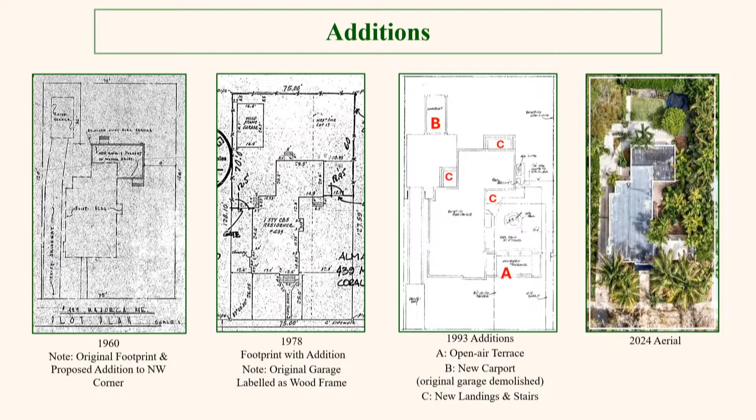The front facade of the original home is dominated by two Mission Revival style characteristics: the curved parapets and the arched openings. The front facade has two bays, the western living space bay and the slightly protruding front entry porch. Each has a central large opening with a distinctive Mission Revival curved parapet above. A convex pointed parapet adorns the living space, and the typical rounded parapet is above the front and the side entry porch arched openings. The parapet wraps around the porch with battlement corners.

Windows and doors on Mission Revival style homes are often arched. This house accentuates the openings with rough-faced cut stone. At the living space window, the stone is arranged in a jack arch fashion. The stone was removed or covered at an unknown date, and a change in stucco clearly marks its location.

Rising near the southwest corner of the home on the west facade is a projecting and shouldered Moorish-inspired chimney. It demonstrates the broader influence of Islamic architecture on the Spanish and its incorporation in the Spanish missions. This influence is also seen in the Mission Revival style. The chimney is a hallmark feature of the home. Flanking it were small windows which were blocked up around 2013. The west facade also has a Mission Revival parapet at its center.

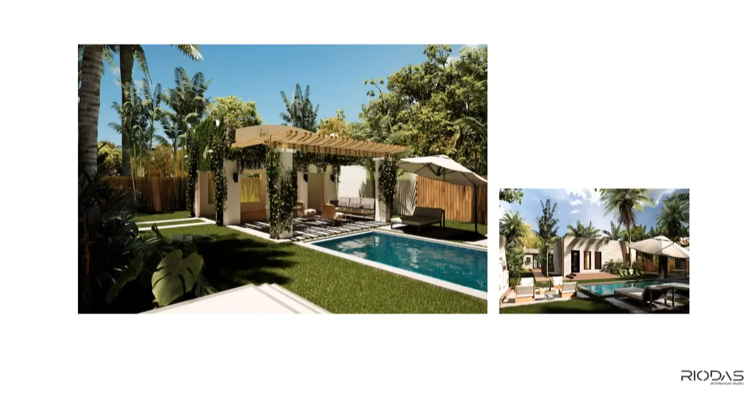This is kind of the style of the rear facade, and we're adding a pool as requested by the owner, by the new owner. Thank you.

Is there anyone else that wishes to speak to this? Okay. Any board members? Questions of the architect?

I have a brief question. Have you looked at the staff report and at all the conditions that staff is asking you to comply with? Are you okay with those, the conditions in the staff report? Yeah, I mean, we didn't get the report. Is that what was sent to us? I'm sorry, I couldn't read it completely, but I can take a look.

Windows and door and what? Okay, thank you. Take your time. Okay. You're okay with all of those? Yeah, okay, 100%. And also with the retain-

I'm sorry, Ms. Rolando. And also to retain the coral rock in the front. Yeah, yeah, thank you. On the east. Yeah, yeah, correct.

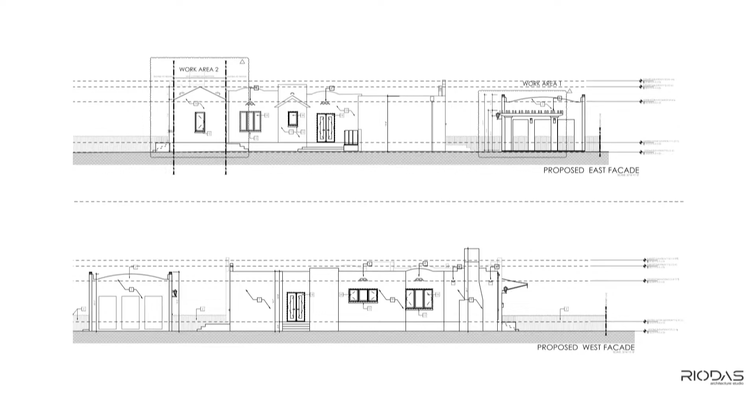Mr. Silva: I appreciate the design work. I don't have an issue enclosing. I mean, we are drastically changing the front facade, but we are altering a 1993 addition, so I don't have an issue enclosing that. I think it's a smart move, and it keeps it as a one-story solution, which I think is smart.

Whoever is making the motion, if you would entertain - right now I think you're counting on the vehicular gates as part of your pool gates, and that is not allowed by code. So you're going to have to add some fencing somewhere. I would ask that you work with staff to establish that fencing, because I think it's going to have to go through that carport and the gazebo area, and that has to be handled well. So I would ask that that gets added to the conditions as we make a motion.

Okay, that's acceptable? Yes. Okay, yes, thank you for that - the pool barrier. Ms. Rolando, any questions? Ms. Everett? Ms. Spain, anything further?

So there is a reveal, there's a setback of a couple of inches on the... Can you go back to the front facade? Well, maybe not, okay. So there is a way to differentiate the addition from the original, right?

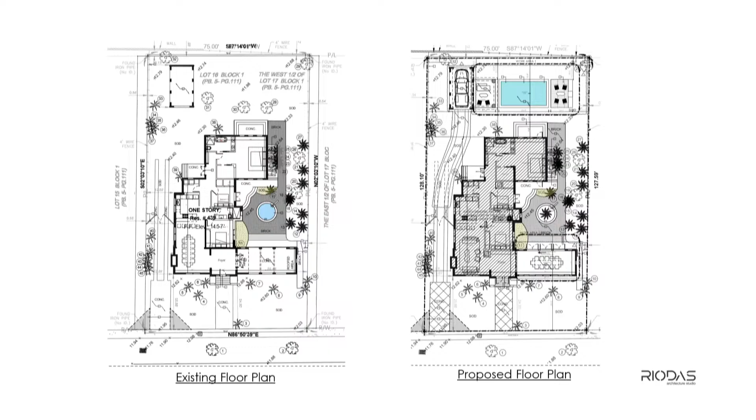Okay, board, what's your pleasure? I'll make a motion if that's appropriate. Okay, we have a motion by Ms. Spain. I'd like to make a motion to approve the design proposal for the addition and alterations to the residence on the property located at 439 Majorca Avenue.

And approve it with the conditions noted in the staff report, with the addition of retaining the coral rock around the, I think it was a doorway, and then also to work with staff in the future on the pool enclosure, the gates and the fence and everything, and with the issuance of a special certificate of appropriateness.

Okay, we have a motion and a second by Ms. Everett. Ms. Spain clarified that this is an additional requirement for the east side door opening - the coral rock. Thank you, we have a motion and a second.

Would you please call the question? Ms. Alvarez, yes. Mr. Silva, yes. Ms. Rolando, yes. Ms. Spain, yes. Ms. Everett, yes. And Mr. Maxwell, yes. Motion carries unanimously.

Thank you very much. Look forward to seeing this in person.

Thank you. We're going to move on to the next case file, which is another combination: case file LDH 2025-014 and case file COA SP 2025-015. Consideration of a local historic designation of the property at 446 Aragon Avenue, legally described as Lot 1, Block 8, Section Coral Gables, Section B, according to the plat thereof as recorded in Plat Book 5, page 111, Miami-Dade County. The applicant is also requesting the issuance of an accelerated special certificate of appropriateness and design approval for additions, alterations to the residence and site work. Variances have been requested from Article 2, Section 2-101D4 and Article 2, Section 2-101D5 for the rear setback of mechanical equipment. May we have a presentation, please?

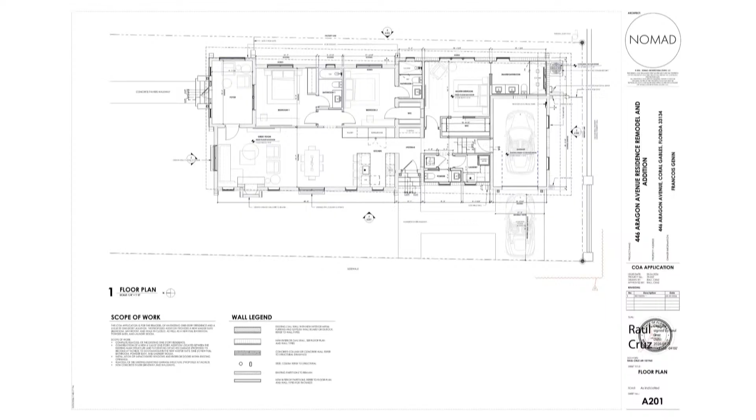The addition is located between the 2 existing structures. Its flat roof and intermediate height create a transition between the residence and the garage, allowing the original massing and historic character of the home to remain dominant.

We are preserving the home's defining exterior features, including the original texture stucco, decorative details, and planters. We will continue coordinating with historic resources staff on the final windows, doors, porch treatment, stucco, roofing, and other details to ensure compatibility with the historic photographs.

We also request approval of the rear setback variance for the mechanical equipment in the proposed location behind a wing wall and a gate next to the existing garage. It is the least visible option due to the corner lot configuration. We respectfully request approval of the COA and the associated variance, subject to the conditions recommended by staff. Thank you, and I will be happy to answer any questions.

All right, thank you. Board, Ms. Alvarez? I agree with the staff report and the addition. I just had a question. Some of these garages were often built out of wood frame. Have you looked at that? We have, the roof is a wood frame, but not the walls.

Are not the walls? No. Oh, that's good. Yeah, that usually creates some additional challenges.

Yeah, for sure. Ms. Spain, do you have any comments? No, I think that this will change the livability of this house. It's very efficient plans. It's very nice.

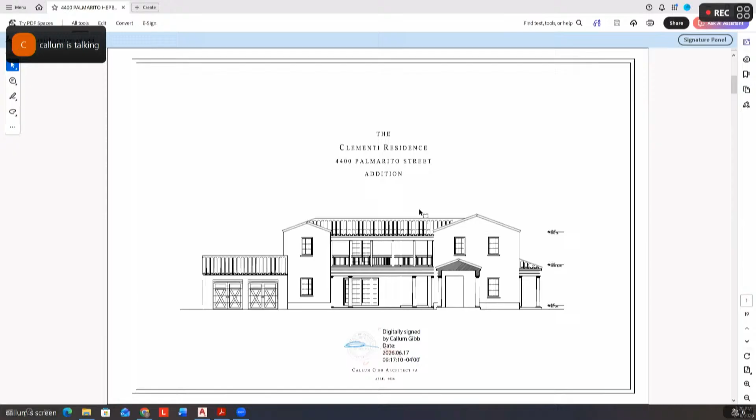Obviously, the house is part of the wonderful Italian Village district, which for me has always been that part of the Gables where the setbacks in the front were usually smaller than in other areas, creating these lovely walled street appearances. The other benefit of this is that you get a lot of courtyard feeling within the district.

The house is on a fairly wide lot, and there's been a pool added, which takes up the whole side yard, as you can see from the survey.

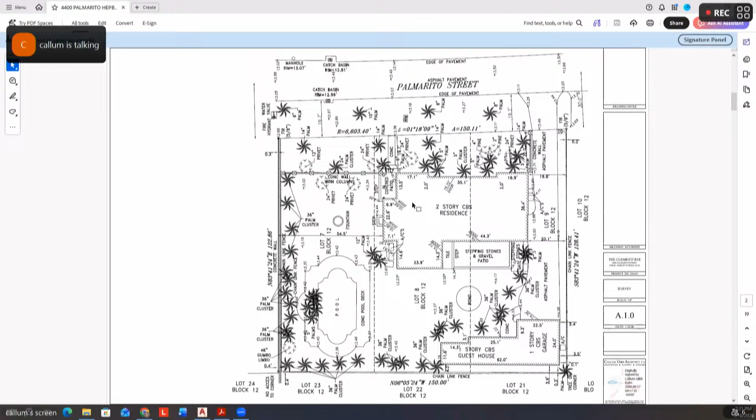Existing site plan, just a little diagrammatic. In the rear, the one-story cottage, which is attached to the existing garage, is the area where our addition will sit. Here are some photographs of the property.

Along the front, you can see that house creates very much a continuous facade with an extended wall to one side, culminating in an arch, a sort of bougainvillea arch which leads to the garage in the rear.

So this is our proposed site plan. The idea being to take down the one-story guest house in the rear and replace it with a two-story addition. Because it then becomes an addition, we have to attach it to the main house in some manner.

So we thought the best way to do that would be through a breezeway with a minimal impact on the main structure.

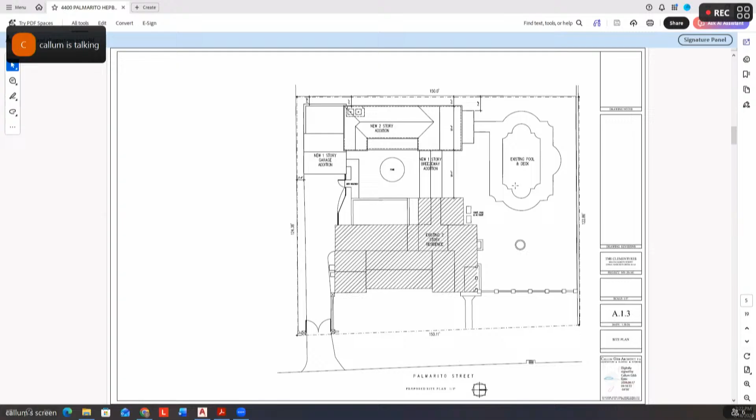Some diagrams: these are the two comparing floor plans, and you can see that the breezeway connection leads conveniently from the kitchen breakfast area across to the new ground floor, and then into the garage undercover.

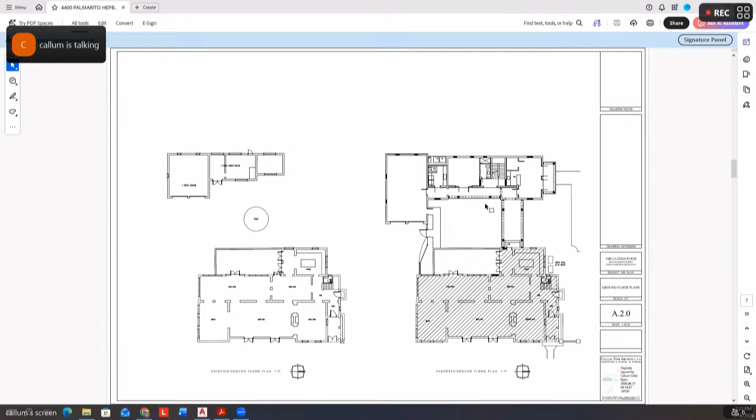This is the main ground floor, and the idea is to expand the living area with a home gym, a game room which could be used for guest bedrooms, and then upstairs two additional bedrooms and a home study.

Again, this is a side, so this is looking from the pool towards the house. You can see the breezeway connection and the massing of the two-story addition.

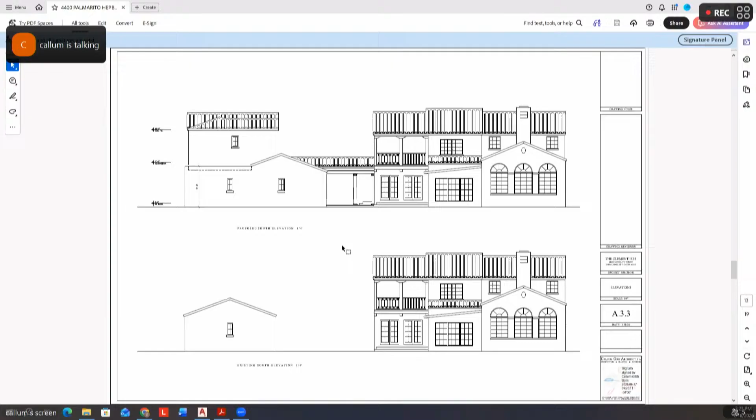This is from the south side looking across. You see the three arched windows in this original house. As you move back into the property, you can see the garage, the two-story addition, and the existing porch that overlooks the courtyard.

There's a rear elevation of the house showing the connection. And this is the new rear of the property. On the bottom is the existing one-story garage and guest house, and then above is the new two-story addition.

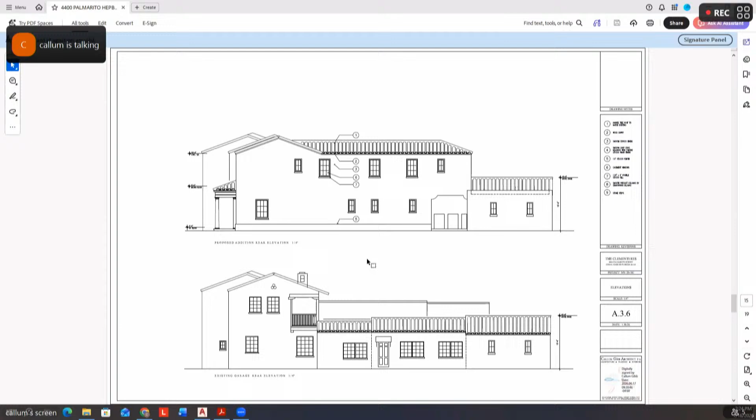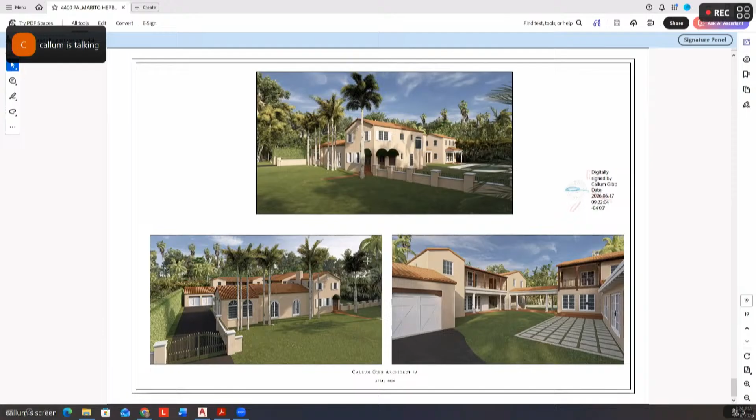I'm going to show you some renderings here, just to show the impact from the street. By locating the addition in the rear, we felt like we'd isolated that home as a complete structure and kept it as original as possible, with a minimal impact on that structure.

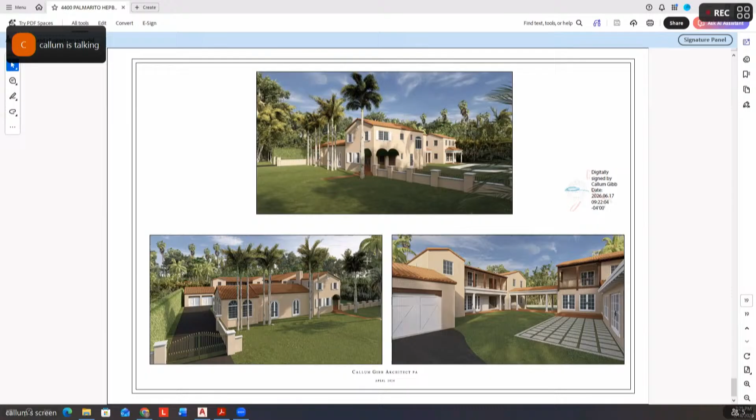And then in the bottom right, you can see this creation of a courtyard, which is developed between the existing house and the new structure.

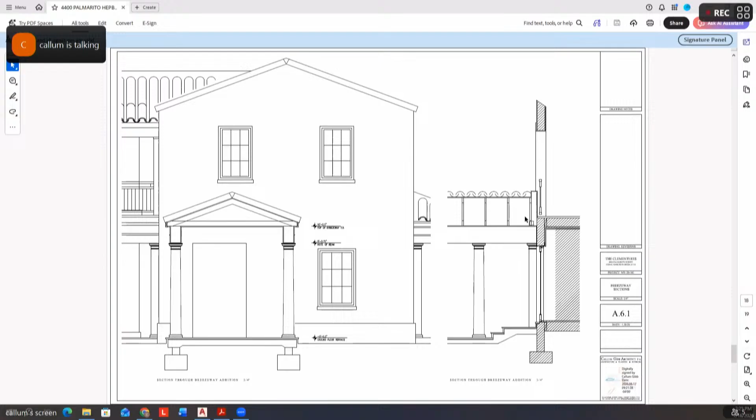I have some pictures also of that porch I wanted to show you.

Try again. Okay, so we got two little porch details here. I think what they show is that the main wooden structure is actually the beam that runs across the top of the porch, and that the vertical elements are really just cladding to the masonry. You can see I don't think there's an embedded wooden column in that corner - I really feel it's more of an implied wooden column. So when we attach to it, I don't think we're going to affect anything structural in that area, and we can adapt that as staff deems most appropriate.

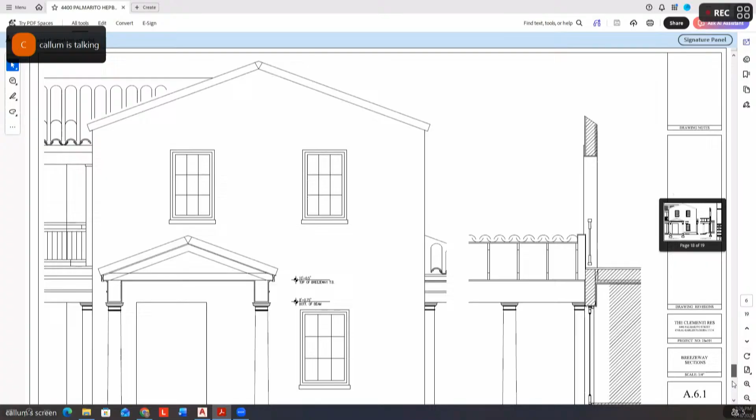So with that in mind, I'll go back to the renderings. Like I say, the goal of this was to expand the property, the living quarters, but maintain the original house as intact as possible. If you have any questions, I've seen the comments - they all seem very reasonable. Hopefully we'll come to an agreement on how best the detail between the addition and the main house is resolved.

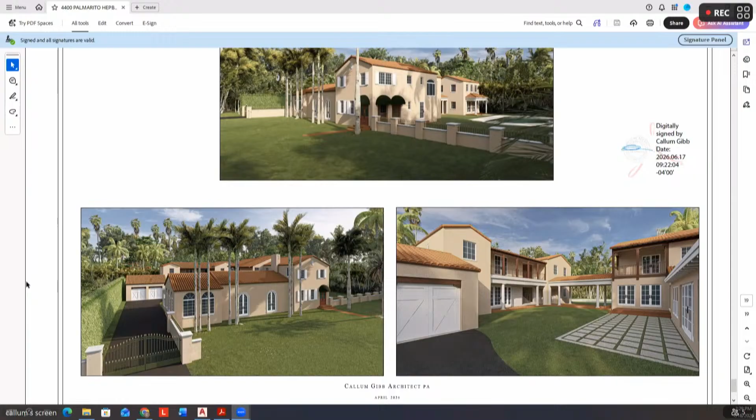There will be a cleaner break between the two. Okay, so there's a clean wall in front, and it's a gable - or is it? Yes, it would be triangular in profile. Let me just get - so it sort of cuts into the... if you were on the porch looking out, you would look through the railings and see the backside of that concrete gable. Okay, and you're confident you can save those rails? Yes, the rails are not original.

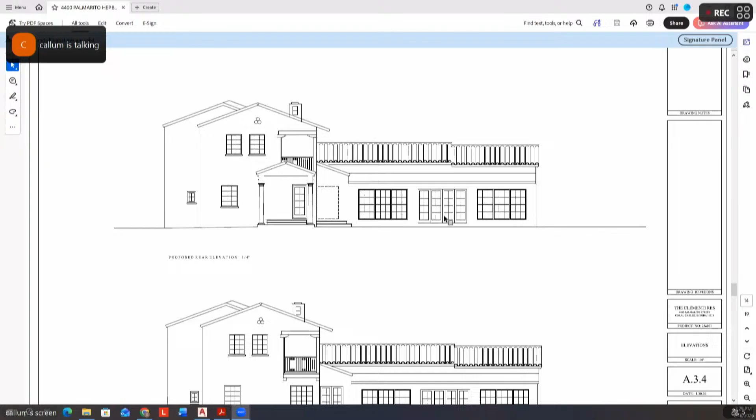Okay, Board. Ms. Alvarez, any questions? No, I just want to say I support the proposal, and I agree with the staff recommendations and the variances. Ms. Bain, I'm good with it.

Mr. Silva: Yeah, speaking about the variance, I think the addition and the way it's being handled and set to the rear is great. I think the massing works well, and you're creating another one of these courtyards you talk about in the district. I'm a little bit concerned that one of the justifications we're using to justify the variance is to save historic fabric, and then we're tearing down a big chunk of that existing building. I think that by keeping the garage, that mitigates it a little bit, and at that point it makes sense to hold that line. So I am in favor, but it's not cut and dry to me. I am in favor though - I believe the variance is justified. Thank you.

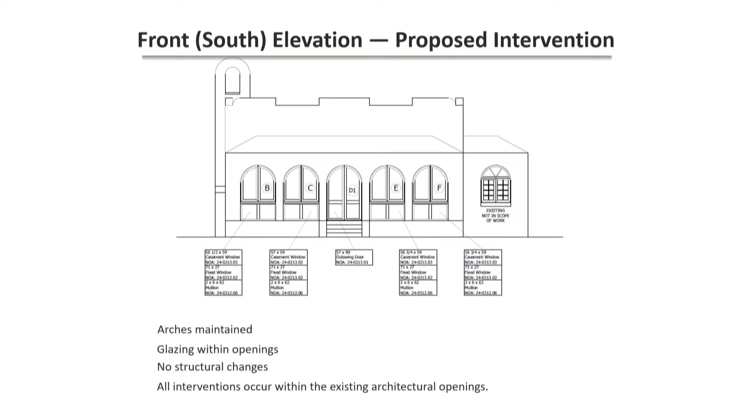Are we going to have another new presentation, or just a discussion? It might be good to hear from them directly, just for the record, and then we're here to answer any questions you might have.

If I may, just to be clear, the document we should be looking at is the one labeled 547 Alcazar permitting 031926, and the revised renderings, right? We're not looking at the old one. That's the old floor plans, but it's all in the same case. So the revised ones are from April. Is that the date on it? This is the newest, March 19th. That's the proposal we're looking at, and that's the proposal that responds to the comments from the September report.

Property owners, please reintroduce yourselves. It's good to see you. Hi, my name is Karina Lorenzen. I have not been sworn in, so I don't know if that has to happen before we start. Apologize. Yes, please, both of you, if you're going to testify, can you please be sworn in. I was here already, sorry. Oh, okay, thank you. Sorry, I can't see with this thing here.

Hi, my name is Javier Diaz. I'm the other property owner. So as mentioned by our very nice introduction here, this is not our first time here.

We are hoping to create a more usable space within our home that still preserves the aesthetic that we absolutely love. We chose an Old Spanish home. I grew up in historic Coral Gables on Navarre. We wanted to be here our entire, hopefully most of our lives. I've only known him 12 years, but this has been our dream for the space since we bought the house. This allows us to have a more usable space regarding any weather conditions. It's also removable if anyone in the future decides they prefer the screened-in aesthetic that is currently there, although we hope to be at this property for some time.

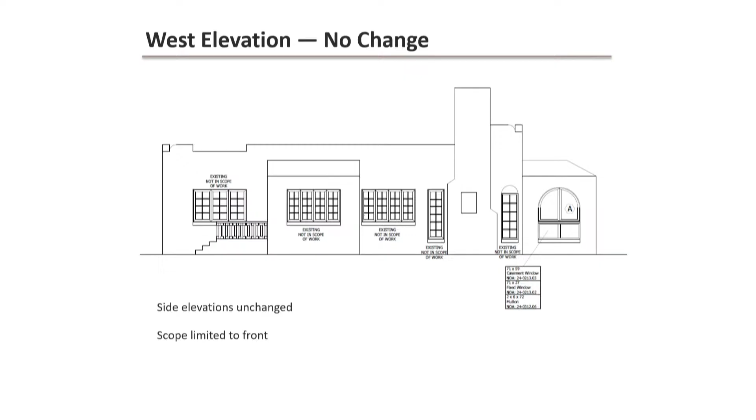Well, thank you, and I apologize that you have to be here so many times. I do have a question for you, hopefully it'll help everyone clear it up. Have you seen a picture of the early home showing the screen pattern, or have you worked with staff on that so it's documented?

Yeah, and then in order to make them operable, that's why the horizontal bar, the vertical in the center, was added so they could have a casement condition on the top half, like a third of the way up with a crossbar. Right, yes, and that would meet the requirement for the 36-inch railing height. So the windows pretty much match what that looks like, as best as they can tell. Okay, thank you, I just wanted to clarify that.

Okay board, let's have some questions and discussion so we can move forward. Ms. Spain, if you'll turn that on. A question and a comment: are you aware that you need 5 out of the 6 of us here to vote? Just want to make sure. Yes, we're aware.

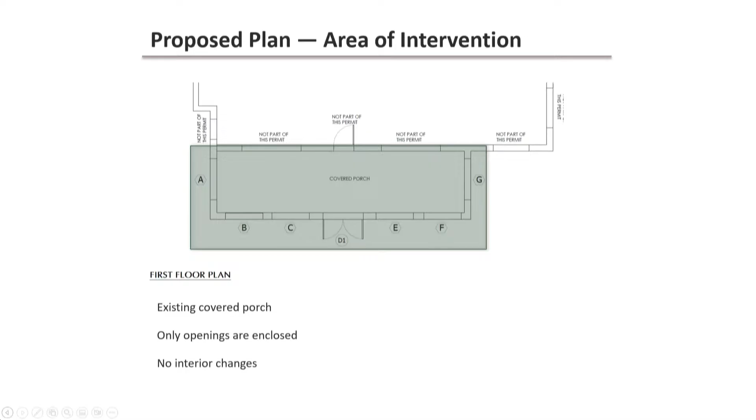Well, this is permitting - did you want a complete floor plan? I don't think there is a complete floor plan because they weren't making any changes to the rest of the building. So here's a floor plan. I just think this is so much about how it attaches, right? Because you have the special columns on the front - those columns have to attach.

We had also been assured that's the case. And then any reinforcement, right? Because that's probably what's going to be necessary, and that would have to happen behind that column anyway. Mm-hmm, so you might have to build out some of the wall, but it'll be on the interior side. Right, I just feel like that's an important consideration that should have been part of the package.

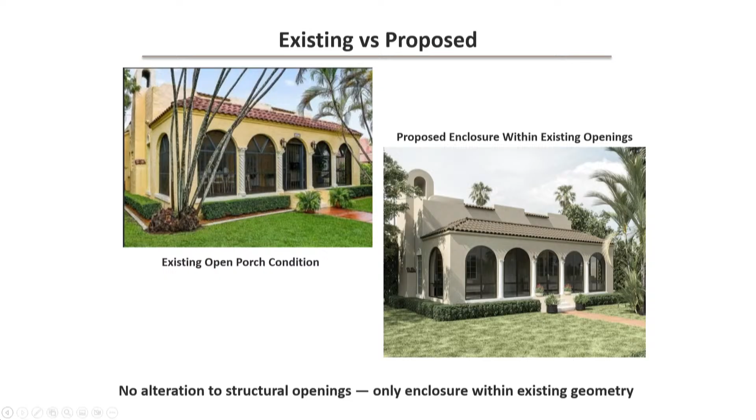I will say that with the column, that column doesn't protrude in the back - it's flat on the back. It is concrete, so you will be able to nail in the windows for the frames. We've been assured of that by both the window company and the installers.

So we can add that, if this is considered today, there could be a specific detail requested for the construction documents to ensure that is included and that those elements are protected during construction.

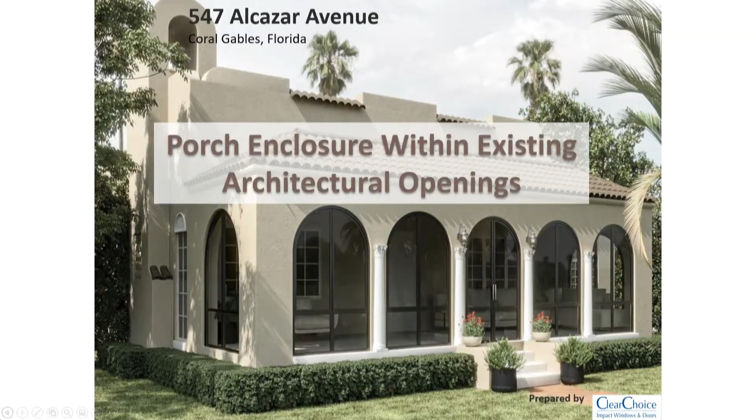Okay, if considered. Mr. Silva? Yes, thank you for working with staff. I appreciate that. We did have some concerns previously when we were discussing this, and I'm glad you heard them. The doors on the ends are gone, and the pattern is more appropriate. As to Anna's concern, can you go back to the actual photo, not the rendering? I believe those columns are, as Ms. Prentice was saying, kind of in front, so there shouldn't be an issue.

I think you're going to be attaching to concrete direct, flat concrete, right? If you go back to that one, you can see it clearly in the blow up, and if you zoom in on the package, here as well. So you're going to be attaching to concrete, and if any reinforcement is necessary, you come inboard, right? Don't go outboard. But that's typical, something you'd work through with staff in your permit drawings. So I am in favor of this as it currently stands.

Thank you. All right, Ms. Rolando, any questions or comments? I like the reconfiguration. I think it's preserving the legacy, at least, of the screened-in porch. And thank you for working with staff on it.

Thank you, Ms. Rolando. Ms. Everett? Since I joined this board about a year ago, so many of the houses that come to us are in the North Gables, and they're the small houses that need more space to make them more livable by today's standards. In fact, the house we just designated at 446 Aragon had a front porch and two on each side that were glassed in, and we just designated it. As I said, when this first came to us, as a young family we did much the same thing in Pittsburgh, Pennsylvania. It was a 1920s stone house where the porch was screened in, and then we glassed it in as our family grew.

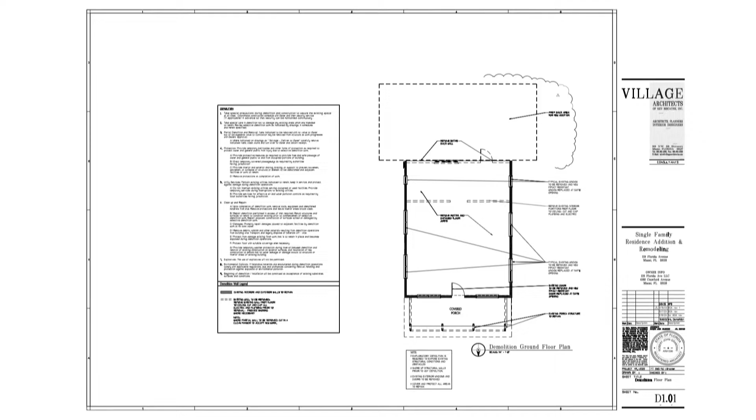Are the homes that you own there, have you restored those? Well, those are not on the historic side - they're west of Douglas Road. But they have all been restored. We have two that are side by side that were once a duplex and then separated at some point, and then we have another freestanding one on Thomas Avenue, and they're all currently rented. Oh, okay. It's added quite a bit to that part of the neighborhood.

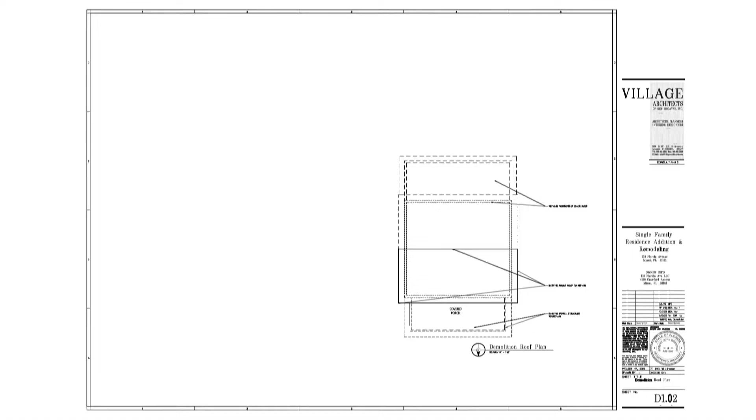This owner also owns a 14-unit building on Grand Avenue and Plaza. So he's very much involved in preservation of, again, the West Grove, which we're losing daily. Gone. Beg your pardon? I said it's gone. I know, and they're taking our canopies, but I won't get into that right now.

This gives you a very good idea of the setback, the entrance to the porch, the entrance to the main home, which only has one bedroom. The idea for the addition is to provide a better living environment with a primary bedroom, a bathroom, a closet, and a large open kitchen.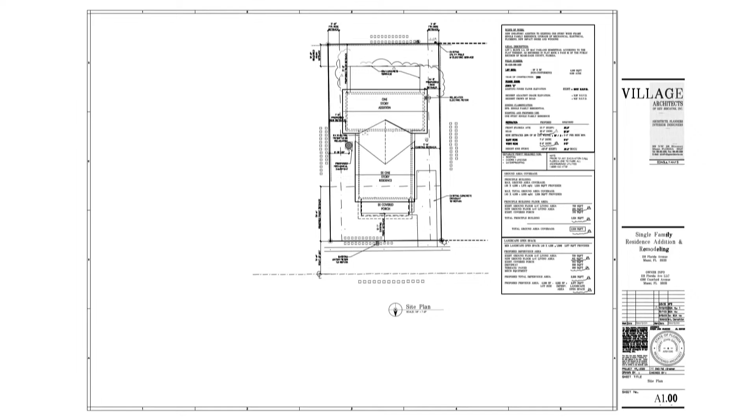Please confirm that in the plans the entirety of the building is being renovated. Yes, sir, that's correct.

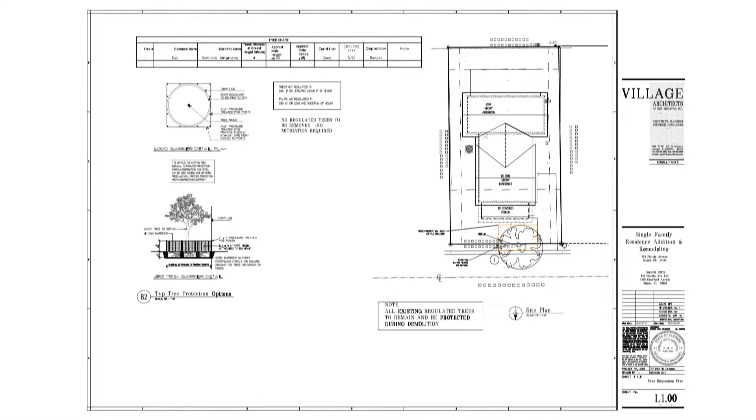As mentioned before, the home needs quite a bit of repair, but it's not unlike any of the other ones we've worked on. They were all pretty much in the same condition. These are the materials being proposed.

Any questions I can answer for you? Board? No? Okay, great.

You're keeping the existing canopy of trees that I see? That is our number one goal, to make the house more livable, but also to keep the character of the home, to the extent that it contributes to the overall MacFarlane Homestead subdivision.

Thank you very much. Board, questions of the presenter? Ms. Alvarez?

I don't know if she'd be able to answer, but I was just curious, would it be true wood siding or Hardie board? I think they're both good. You're going to need to come back up so that your responses will be on the record.

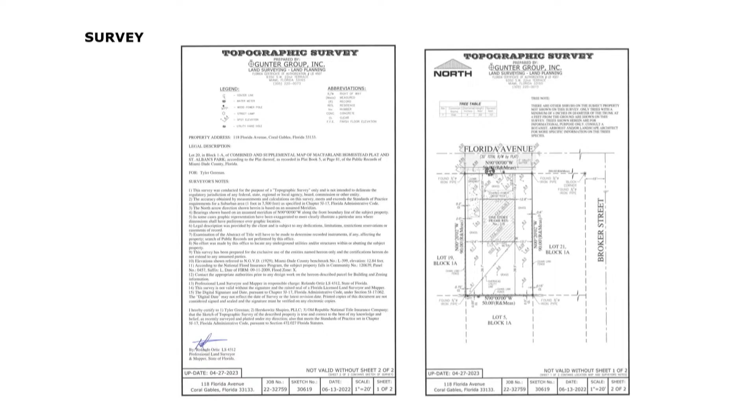All right, sir, your questions? And so that was my first question.

The second is a remark or comment that may lead into a question. I don't know if this is the right board to bring this up with, but considering that many properties in that neighborhood are made of wood, and termite season is year-round, I noticed after doing a little research that the white lights on the street — the LED, or maybe halogen, some kind of white light — draw in more termites than yellow lights do. Since LED lights can be programmed to be a yellower tone, that may minimize the risk of drawing in termites in the neighborhood and advance preservation efforts. So something worth considering — this is amateur research, obviously, but worth looking into.

Well, thank you very much. I think, unfortunately, the lights are controlled by FP&L. This board's been through that.

Did you get a notice about this meeting? I looked across the street.

I was having coffee and I looked across the street. I saw it. But you didn't get mailed notice? No, I didn't. I was just a nosy neighbor who got close to the property and read the sign. Side note, the mail's been... Well, thank you very much, we appreciate that.

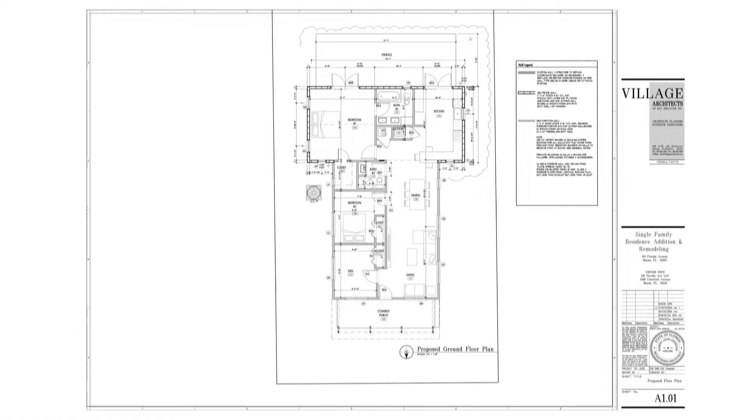I was expecting since May. Okay, is there anyone else who would wish to speak for or against this? Is there anyone on Zoom? No one on Zoom, so we're going to close the public portion of the hearing and come back to the board for action.

Okay, I have a question. Yes, ma'am. Who sends these notices? My question is, who sends the notices to the homes in a 1,000 foot radius? Is that the historic department? The labels are provided by the applicant, and the city prepares the notices and they're mailed out through our mail.

And just to confirm, because this property was actually on the last agenda as well, notices were mailed for the previous meeting when the item was deferred, and for this meeting as well. So you mailed out two notices? Yes. And the property's posted physically on the site, that's why I think what they were saying had mentioned. So that's been up, and the property is posted at the time of the Board of Architects meetings, so it was also posted for BOA last week or two weeks ago.

And for the record, the code requires that mailed notice be sent to the property address as well as the mailing address on the Miami-Dade property appraiser. Should that be a different address, for instance if there's an owner not occupying the building, it goes to sometimes two addresses. Really? That's been a recent change. Yes, that's good.

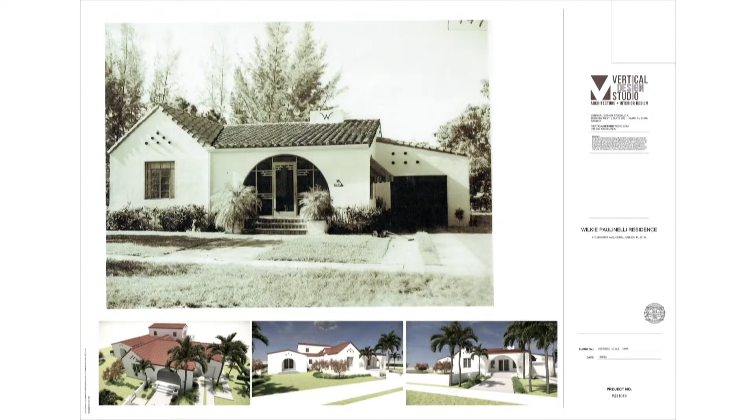As you can see on the renderings at the bottom, the perspectives, our intent was to set back the addition and alterations to still highlight the existing portion of the residence. We're only connecting at the rear and basically going towards the rear.

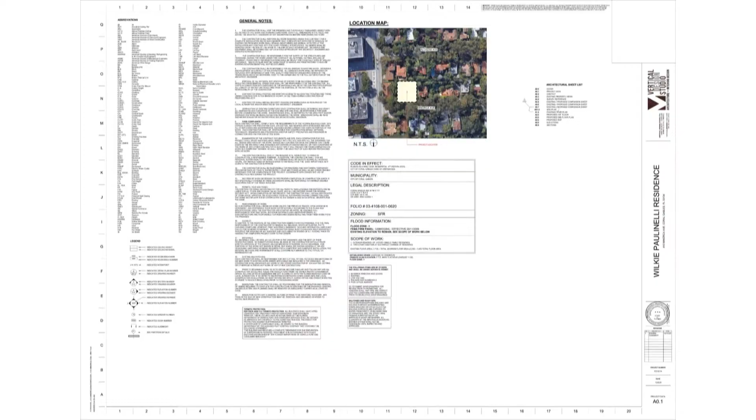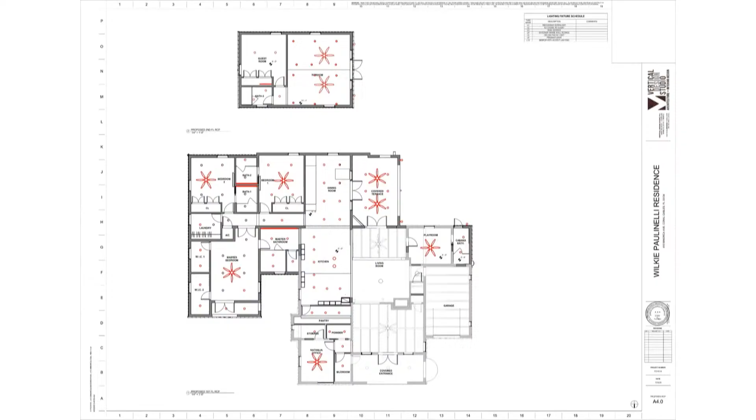The early photograph from 1935 shows a screen porch. Thank you for bringing that up. That's the one point where in the conditions it was phrased as to consider bringing the screen porch back, but the homeowners do not want to. We are willing to make all of the other changes.

That's pretty important, one of the very few chinoiserie details you'll see in any building in Coral Gables ever, what we used to call Chinese Chippendale. I agree, but I have discussed this with the client, and they really would like to stay away from the screen porch.

Okay, thank you. But now it's just open, right? There's nothing there, they've taken it all out, it's just an open maw. No, it is currently open. Yeah, the screen porch does not exist now. In our report, we were recommending that if it was considered, we would work with them on the details.

I have an issue with staff increasing the scope of work on anything that was submitted for consideration, because we cannot require it.

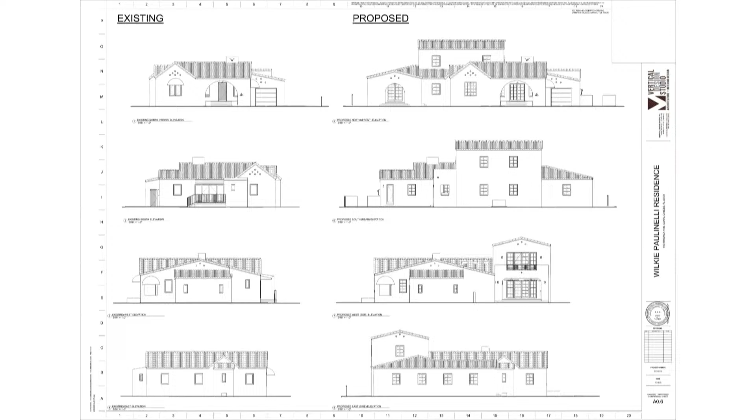Is there any consideration for screening for the one-story addition? Screening as in landscaping, so you don't see it from the street. We are proposing a low property wall, and certainly we could have screening, vegetation screening.

This just overpowers the house.

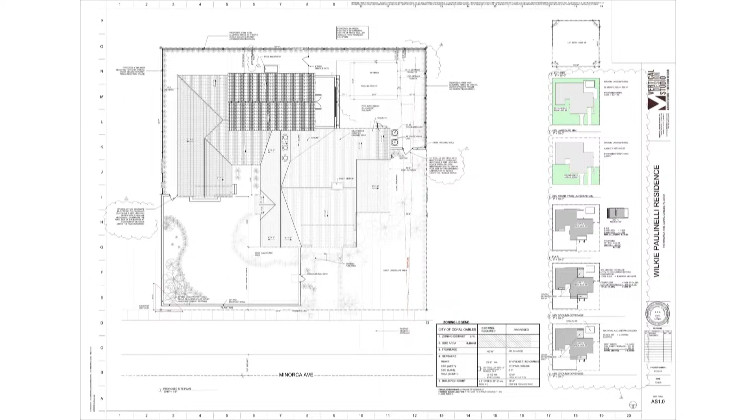Would you consider not doing those decorative vents over the archways? This is a very small comment compared to the size of the addition, but the decorative vents shouldn't compete with those that are original to the house. Yeah, absolutely, I don't know.

One question: the lot is 100 feet in the front. What's the other dimension? Let me check. Sorry, 100 by 100. Okay, thank you — a square lot.

When the homeowners purchased the property, it was not designated historic. We, through conversations with the historic department, offered it to be designated. The intent of the homeowner originally was to build a larger home, to demolish this one — well, no, I don't know about demolish, but they were not constrained by historic sensibilities.

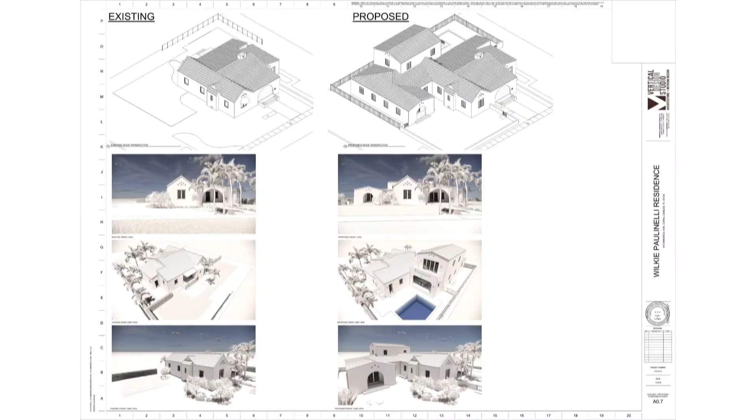Let's go, right? Okay, let's do that. So wait a minute, before we get to the motion, we've got to go through the procedure. Are there any other questions that we want to have of the architect right now?

Hearing none, we're going to close that and ask the public. Is there anyone here that wishes to speak for or against this? Is there anyone on Zoom? We're going to close the public portion and come back to the board for a motion.

Okay, here we are. I will make a motion to approve the application for design approval for an addition and alterations to the residence and site work on the property located at 410 Minorca Avenue, with staff conditions and an additional condition to study the one-story portion of the addition and look at a hip roof in that area and altering that arched opening as well.

I second that. I'd like to amend that motion and add that they include large landscape screening and maintain that screening.

Could you repeat that, Michael? I'd like to add that they add a large landscape screening in front of that addition that would screen it. I don't mean a low wall, I mean a high hedge, or whatever is legal for the height of a hedge. Something that screens it out. A landscaping screen, yes, not a wall.